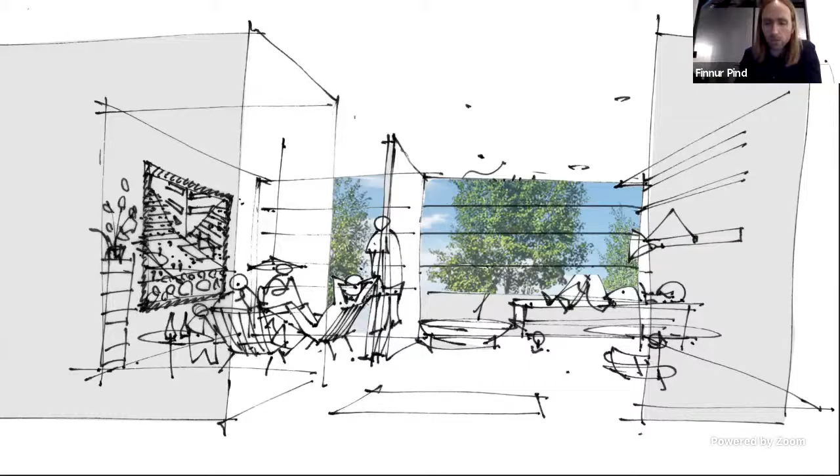And then when we go outside, that's a whole other domain, but again, serious negative impacts due to noise. For example, the World Health Organization says that noise is the second most harmful environmental factor affecting human health, just after bad air quality. And noise is generally on the rise across the globe. They say also that just in Europe alone, more than 1 million healthy life years are lost every year due to noise. So it is indeed a huge public health issue.

And then last but not least, of course, in concert halls and cultural spaces, auditoriums and so on, it's desirable to have the appropriate acoustics. This hall that we see here is actually just a few hundred meters from where I'm sitting right now. It's here in Reykjavik, Iceland.

Harpa is the name of the concert hall, or the building itself, and the hall itself is called Eldborg. This is designed by Henning Larsen Architects, and the acoustic consultant was Artec from the US. Very nice hall, if I may say so.

All right, but as I mentioned earlier, Treble's history goes back quite a few years before early 2020 when we actually started the company. When we started the research work, that was around 2016. We set out to address this question that I write up here. Can we develop some technology or some methods that can make sound be a more integral part of building design, such that we end up shaping spaces, doing space planning, selecting materials with sound in mind, or driven by sound, hopefully from the earliest sketches and throughout the whole design process.

And it's a kind of a tricky thing because sound is indeed an intangible phenomenon. It's invisible. It's hard for people to relate to and to design it and work with it, both from an optimization perspective and also from a creative perspective, if you want to create some interesting or even thought-provoking soundscapes. It's hard for people to do that. So we really wanted to develop some technology that helps with this.

My PhD project, which was the initiation of this work, was actually initiated by Henning Larsen Architects. They were quite often running into problems with sound. They would design something that looks great and works in various ways, but then sometime late in the process, some sound specialist would be brought on board and they would say, sorry, it's all backwards here. We have to go back to the drawing board because it's going to sound terrible. So they were repeatedly running into issues with sound and acoustics and wanted to try and develop something that could address this issue. And that's how my PhD project came about.

Just one second break here.

So if we take one step back and think a little bit about what's going on behind the scenes, this slide illustrates the process. Ultimately, we need to do some simulation of sound to be able to understand it, design it and optimize it. The process works in this way: first we start with some input data to the simulation. We need obviously a model of the geometry in question, whether that's an interior space or an outdoor domain. We need some information about the surfaces in the space or domain, the acoustic properties of how different surface types absorb sound when a sound wave hits them.

And we need some information about what sound sources we expect to be present. We then feed this to a simulation algorithm that computes how sound propagates in the space, essentially how sound is radiated from the sound source, bounces around the room or the outdoor domain, and then reaches some listener or receiver.

And then the output of the simulation can be in various forms. We can get out just kind of graphs and numbers. For example, this parameter reverberation time, that's quite commonly used as a sort of indicator of acoustic quality or acoustic comfort of the space. We can visualize sound. That can be helpful in certain cases.

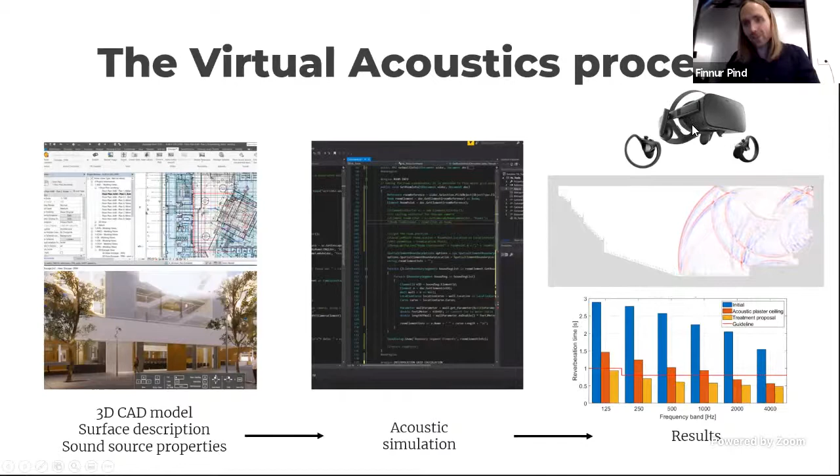For example, here, designing a concert hall and you want to design some sort of canopy up here, which reflects sound to all seats in the hall. Also, if you want to spot some undesirable echo patterns or things like that. But then maybe the most interesting part, arguably, is rendering of sound, so we can experience how the space actually sounds. And our take on it is kind of summarized here in this product that we're currently developing.

It's still in development, I should say. We're planning to release it late next year. But we're already doing various pilot projects with all kinds of interesting people from the industry, using it in practice. And I'll give a couple examples of that later. But what we very much want to do is we want to plug directly into the workflow of the industry and into the tools of the industry.

So we don't want to make a standalone tool, but instead we want to be a plugin into Rhino and Revit, perhaps other common 3D modeling platforms. At least to begin with, we're starting with these two. And this way we're hoping that the whole effort and manual labor that it takes to set up and perform an analysis of acoustics will be very, very fast and efficient. And hopefully that in turn leads to people doing it more, because it's not a whole thing to have to do it.

Nowadays, if an architect is designing something, let's say in the rather early stages where the design is maybe changing a lot and fast, then if you need some input on the sound or the acoustics, very often the architect calls up his acoustician and they get an answer two weeks later or something like that, because it's a very slow feedback loop. And that's not ideal, I would say, and often leads to the acoustics just being evaluated at the very end, when the design is more or less set, and that's obviously not good, because then we can't really work with the design from the sound perspective.

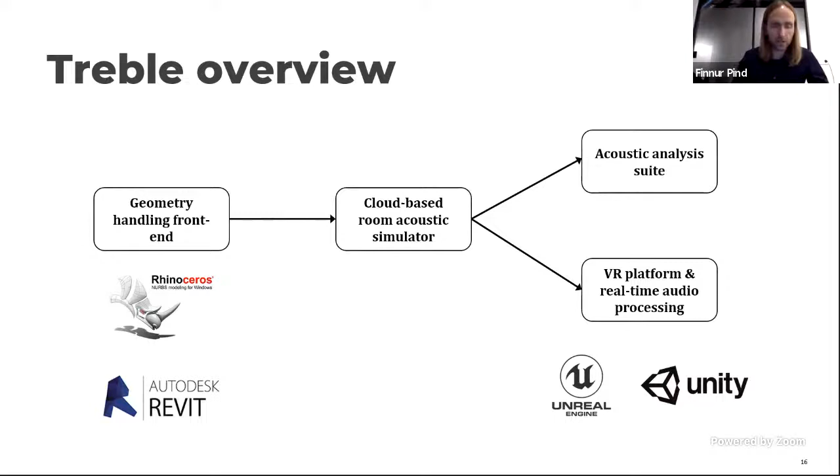And so I'm just trying to say here, we're very much working on this part of the whole chain. That's kind of where our main challenge is, I would say, at the moment, actually. So it's very interesting. Got it. Okay.

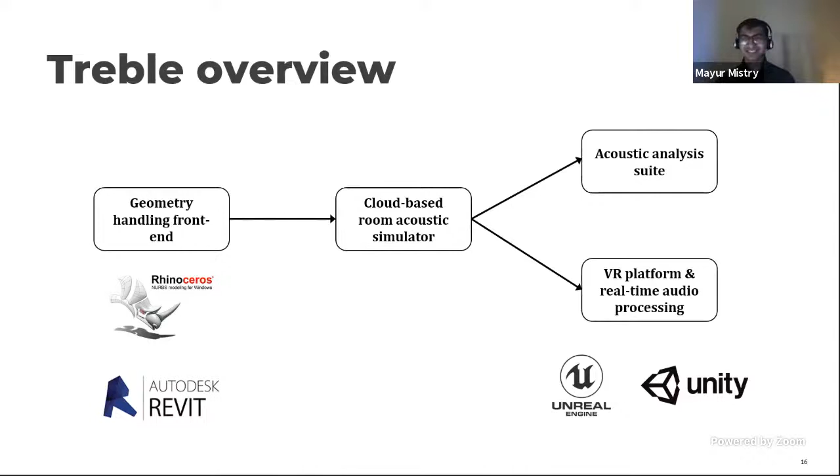Here is a quick view of the tool, the way it works now. It's still very bare bones, I would say, because as I mentioned, we've mostly been focusing on the back end, on the core engine, but now we're just starting to dip our toes into the front end and the link to the geometry and so on. But what we can see here is, let me just pause this a little bit here.

So here we have Rhino, which I'm sure you're familiar with. Have some simple model of a small open plan office here. This is an example. And then our tool is sort of a plugin into Rhino. And then you have the layer structure here from Rhino. And then we have our own separate Treble layer, which is where you put in the relevant geometry and some parameters for the simulation.

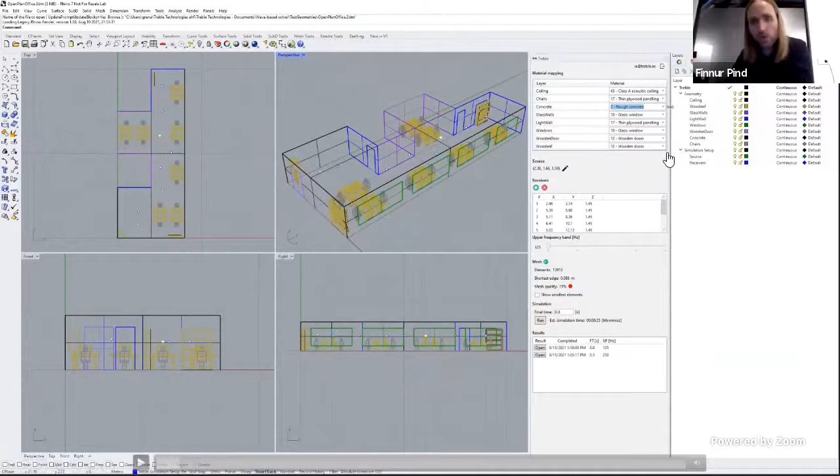And then here in the plugin, you adjust some configurations for the simulation. You need to assign the surface properties that I mentioned earlier to the different surfaces. Again, this is very bare bones at the moment, but still, we're able to run the whole process here. And then you put in a sound source somewhere in the space and a bunch of receivers. That's where the listener is positioned.

I don't know if I should go into details. There's some details that you need to set here for the simulation, some parameters, and then you essentially just hit run, and the simulation goes to the cloud, and then you get back some results. Let's just take a look here. So here's a material assignment, creating the mesh, as I mentioned earlier, done in the cloud, and then hits run.

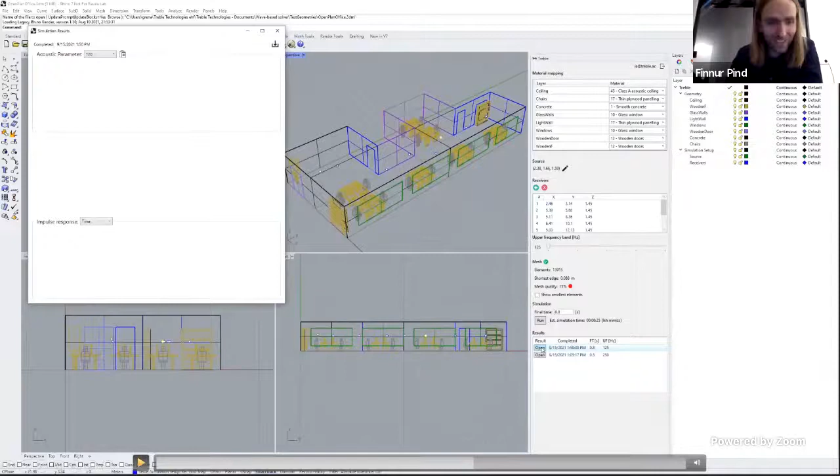And I will admit that we cheated a little bit there. It takes a little more time than just the 2 seconds there, but not so long, but still we cut the video there. But then here you get out some graphs and numbers, as I mentioned earlier, that can describe the acoustics. What we're seeing here is more of an engineering tool, so more detailed, rather than a tool that's maybe more aimed at designers.

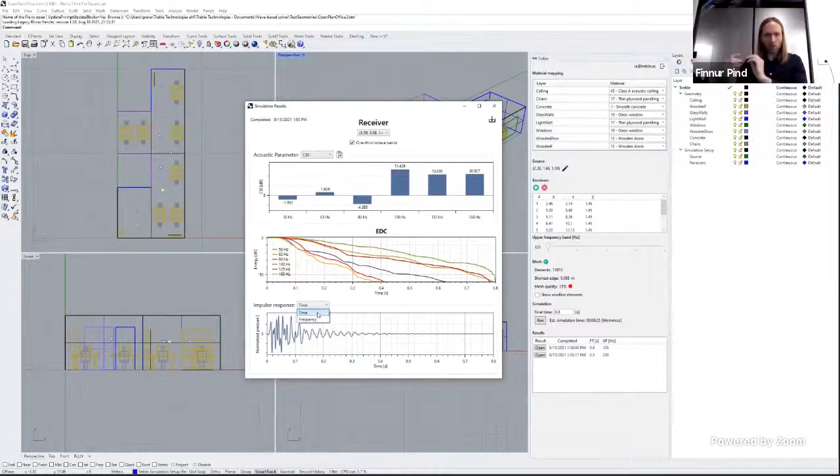So our plan is to develop 2 versions of the tool. One which is super detailed and super engineering-y, where you have all the little nuances and details that you can analyze and so on, which is aimed for the acoustic specialist. And this is heading in that direction. This is our alpha version of that tool.

But then we want to do another one, which is equally powerful on the simulation engine, but with a much simpler interface and simpler usability and workflow, aimed more for people who are not specialists in sound, like interior designers and architects and so on, but to enable them to do some sort of evaluation of the acoustics and at least push the design in the right direction.

And then you probably won't see details like these technical things here that you need to adjust in the simulation, and the results will be more simple and so on. But I thought I would still show you where we're at the moment.

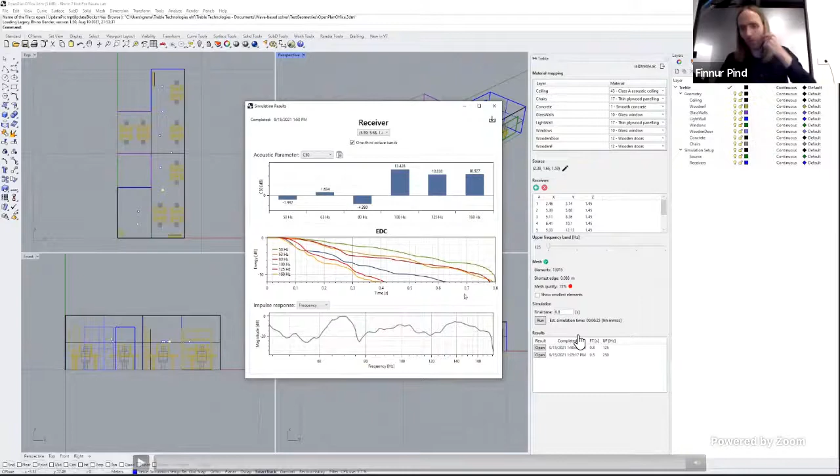Yeah, I was thinking it might be interesting, like sometimes we compare different materials during a simulation. So if in a drop down I can select a couple of materials, and on the cloud I can do parallel computation and do a comparative analysis report. Absolutely.

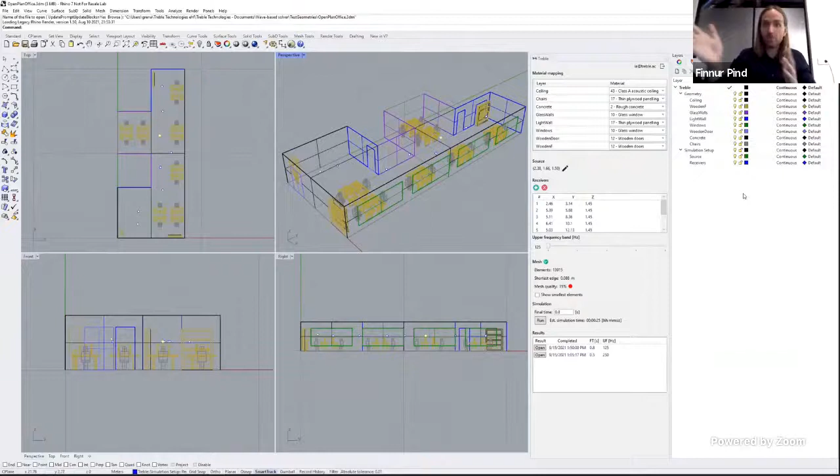Exactly, exactly. That's one of the big things that we would probably design and optimize: the geometry, the space planning, and then the materials, and being able to ship to the cloud various versions of this and then get back results and compare them in some simple way. That's the ideal, I would say.

Hi, Finnur. Richa this side. So my question here is, when we talk about insulation and material, are we talking about the walls and stuff? Also, are we talking about lights, which have some acoustic conditions, or some paneling? Do we talk in that detail?

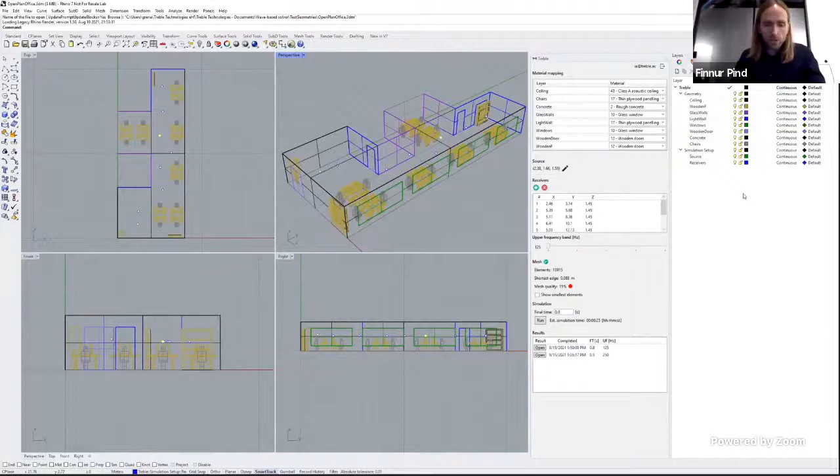We try and take into account all the surface properties, you can say, in the space. Lighting per se, we don't evaluate, but if you have some absorbing free hanging fixture, whether that's a lamp or some free hanging baffle or something like that, we can certainly take that into account. Does that answer the question?

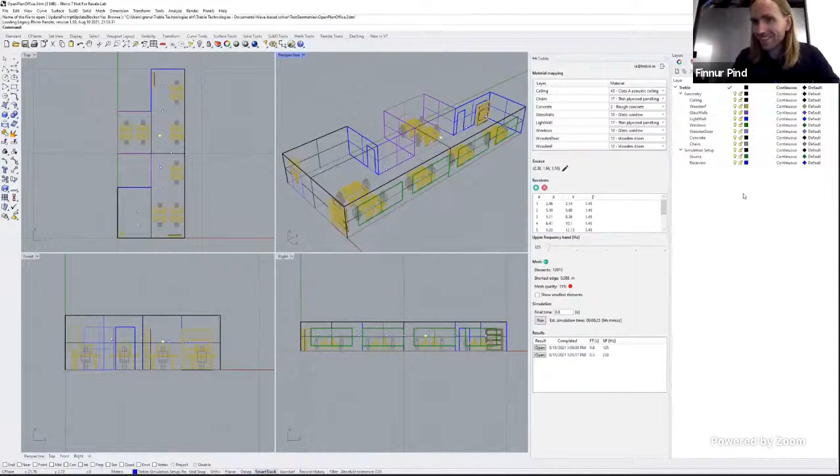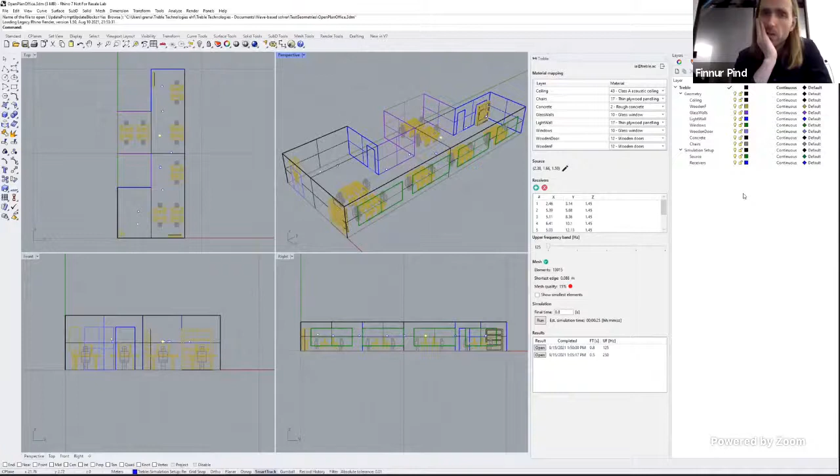Yeah, in this process right now, how do we give that input that we're using that certain light? Will this automatically adjust and understand that that light has a particular material, so it has some absorption capacity? Yes, absolutely. So you can put that in; at least the way it is now, you would have to draw in the fixture or the lamp and assign some material properties to that. Then it would take that into account. Very good. Okay.

Here's a quick overview of the different key tech features that we've developed. First of all, the simulation engine. We've done a lot of research into developing a totally new way of simulating sound and how sound propagates in a space, which is much more accurate than what's been previously possible. And that is enabling us to create these authentic listening experiences. It's been kind of difficult to do that up until now.

You can certainly do sound in a 3D model. For example, video games have had that for many, many years. But if you want it to be physically close to reality, because ultimately we're designing reality when we're designing buildings, that has been very difficult because the fidelity of the simulations just hasn't been there. We teamed up with leading scientists in the field of computational mathematics and wave simulations and ended up developing this very new approach to simulate sound, which enables this.

Then we have a whole system which enables us to take those accurate simulations and experience them in the audiovisual virtual experience, in real time, where you can walk around, interact with the design and so on. A whole other world, which I won't go into the details of, but I spent a lot of time during my PhD researching, was how different materials absorb sound. For example, the lamps we just discussed: it can be quite complicated how a material or buildup absorbs sound, and to incorporate that accurately in the simulation.

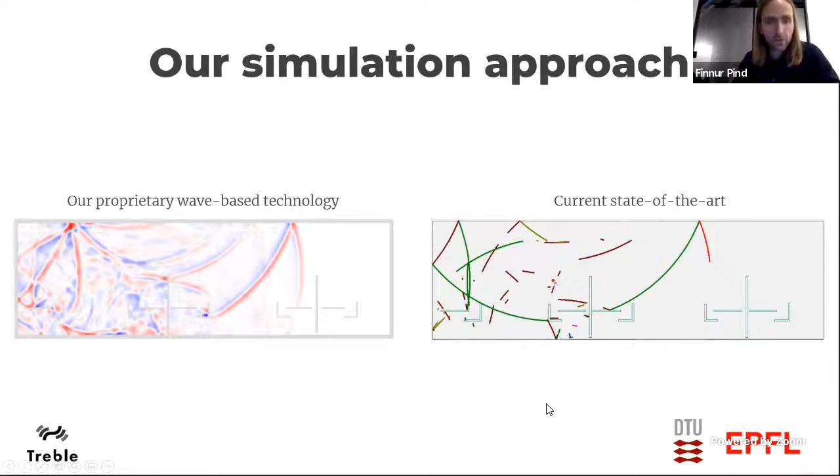Here's one illustration which compares the way we simulate sound to what's typically done today, for example in video games and the few tools available for sound design in buildings right now. Our approach is what is called a wave-based approach, where we actually solve the physics equations involved and capture the wave nature of sound.

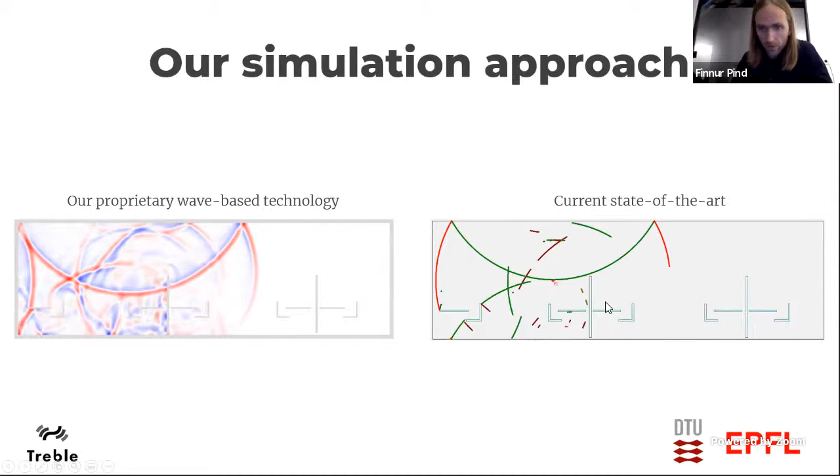Whereas the current approach is what's called ray tracing or geometrical acoustics, where we essentially neglect the wave nature of sound. This is meant to be an open plan office here. You can, for example, see how sound bends around this partition wall, whereas in the ray tracing approach it doesn't do that. So that's maybe a bit technical discussion, but very interesting still.

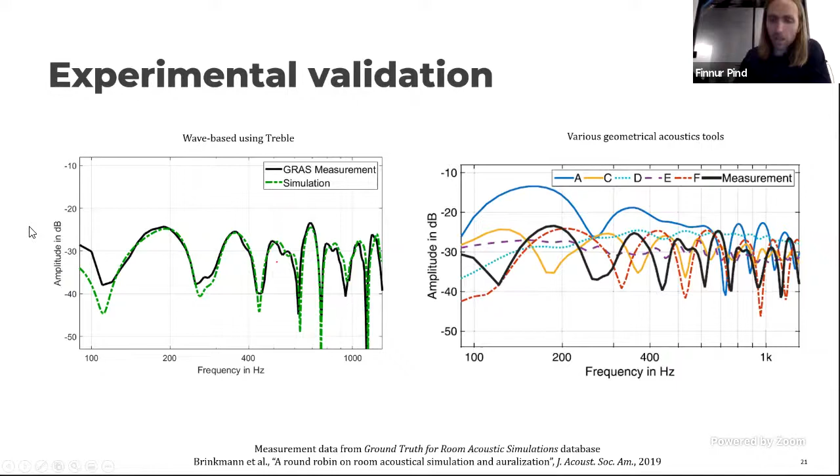And as you can see, actually none of them are able to model this kind of complex geometry. But when we use our wave-based approach, we are able to capture this with pretty good detail. So that's an indicator of the fidelity of using this wave-based approach. Okay, that was for a static case, but it gets even more important when we start listening to the space and walking around the model and experiencing it, because these wave effects have a pretty big impact on the way we perceive sound.

So these are two well-known problems that illustrate the issue here. One is called the lamp post problem. So imagine you have someone making a sound over here, and you're standing here, and there's something very small that directly blocks the line of sight between you and the source, like a lamp post. Then in reality, if you have a lamp post between you and someone talking to you on the other side, it has no impact on the sound whatsoever. Sound just kind of goes around it.

But if you don't capture this wave nature of sound, then you would get a very unnatural blocking of the sound when the line of sight is blocked. When you move your head just a little bit to the left, you would get this jump in volume because now the sound is there. But in reality and with the wave-based approach, we capture this bending around obstacles phenomenon, what's called diffraction. And then the whole listening experience is more natural.

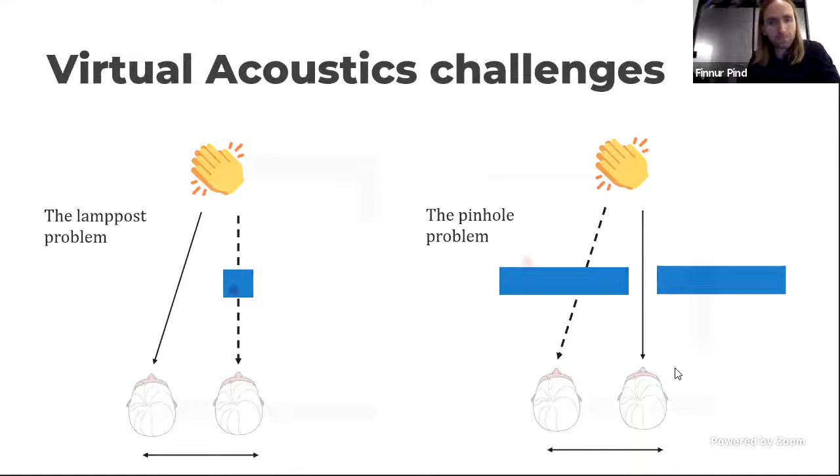And then an analogous problem is when we have a big surface with a small slit in it, then again, you would get this unnatural jump in volume if you don't capture the wave nature of sound. And this is, as I mentioned, due to diffraction, which is this phenomenon of sound waves bending around obstacles and around corners, the reason we can hear someone that we cannot see.

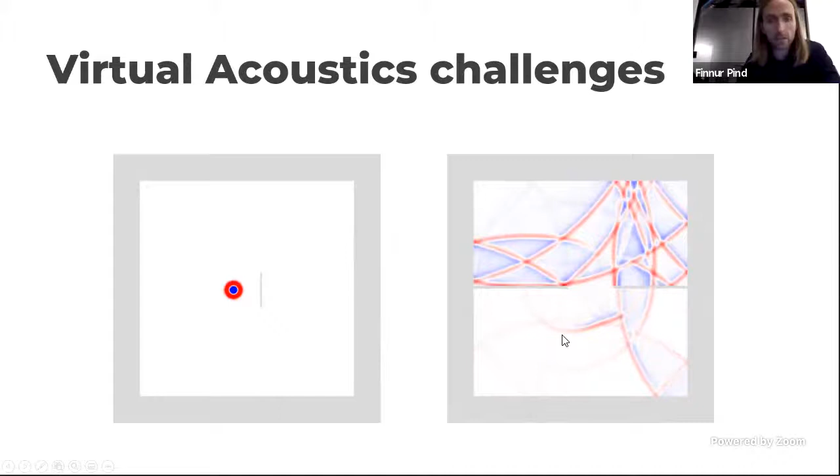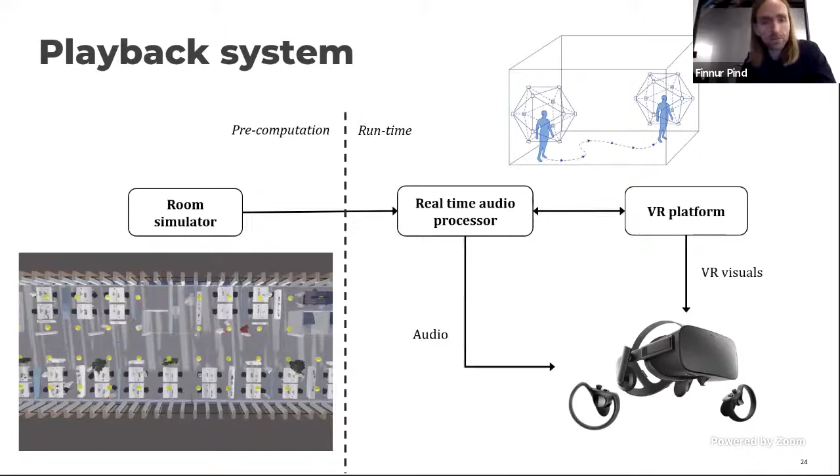Okay, now we're done with the nerdy part, the technical parts. We can hopefully come down to earth again and take a look at a couple of examples of case studies. The first one I want to tell you about is something we did together with Henning Larsen Architects. We, of course, have a very close connection to them. I did my PhD with them and so on.

And this was a city hall in Uppsala in Sweden. It's a part renovation and a part new build. So they expanded the size of the building fourfold or something, I think. So it was a very small building beforehand, then they greatly expanded the size of the space.

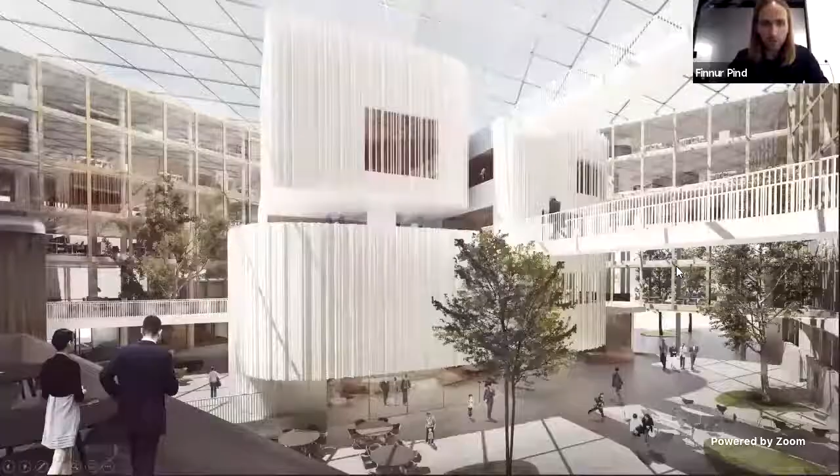And it's mostly office spaces, but also you have, for example, this very large, nice atrium space there in the middle. There's also a nice big auditorium here. It's kind of an interesting building. I think it's kind of a building within a building. So you have the outer building, which is kind of surrounding this big atrium space, and then you have an inner building or interior building here in the middle, which has the main city hall and so on. So it's a pretty cool design.

This atrium space is actually open to the public, so people can walk through here. So we can expect at times that there will be a lot of people present in the space. There's a cafe in here. At times politicians will be coming out of the main city hall. So it's kind of tricky from a sound perspective. And then on top of that, on the material front, we have just glass everywhere, glass ceiling, hard floor. So again, tricky space.

So what we decided to do was to do a virtual mock-up of this space during the design process, where the architect and the client and all kinds of stakeholders could experience different design options. They could play around and test out different things and see what worked and what didn't, what impact it had on both the aesthetics and the sound, and help them make an informed decision. And it proved to be very valuable in the process, and helped everyone understand the importance of taking sound into consideration here, and understanding how far we had to go in order to make the space comfortable. So I will show you a video from the virtual mock-up.

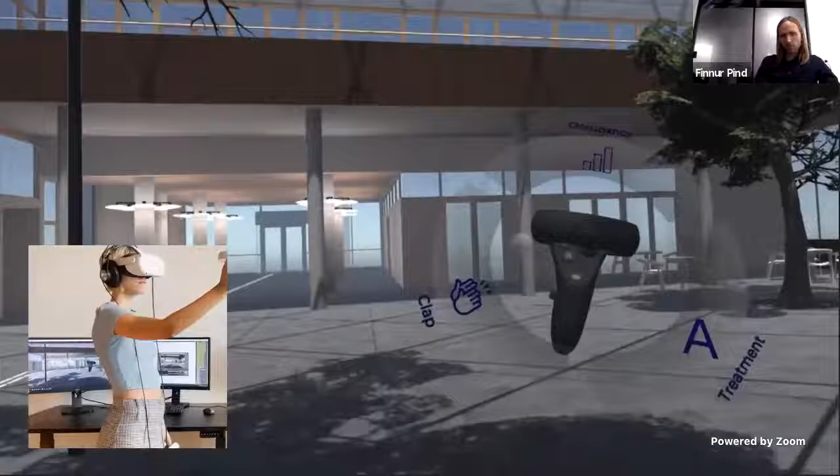Now she'll go into the auditorium.

Made up of words that come to me spontaneously, words that speak the honest truth. Expect from me nothing else, because I do not believe, fellow Athenians, that I should be appearing before you at my age, behaving like a child, trying to construct over-adorned speeches. This is the only thing.

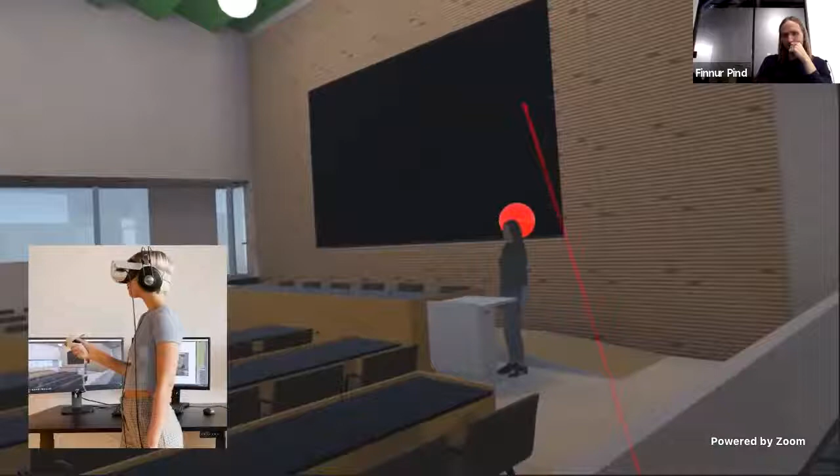She's turning off the sound source so she can hear the sound from outside. Then she switches and you can hear the level go down. And come back. So this is one of the early pilot projects that we did. Still things are in development, and all kinds of aspects that we would like to improve, but I think it shows the idea of this virtual rendering part of our offering quite okay.

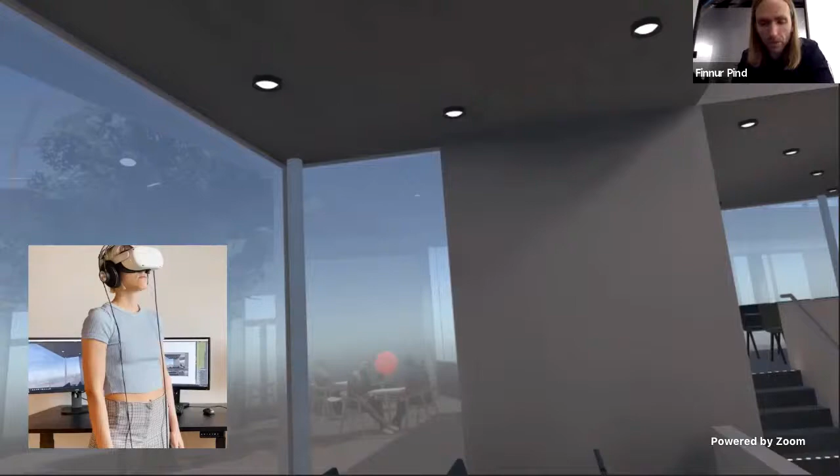One nice example of an outcome of this work was that we ended up designing these wooden frames which were incorporated into every element of the glass facade that surrounds the space. And these frames have the dual function of both just looking very good, I think, and of absorbing sound. So we have some sound absorbing material here behind. This was a big part of what we ended up doing to help ensure a good environment in here, along with some other things too.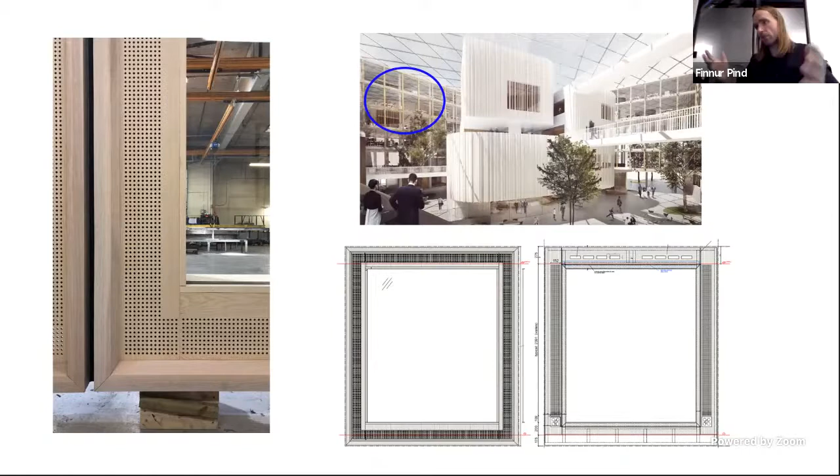But I just think this is a nice example of what can happen when we think about sound in the early design stages. Then we can actually incorporate the sound design into the architecture, as opposed to it just being something that we kind of plaster on afterwards.

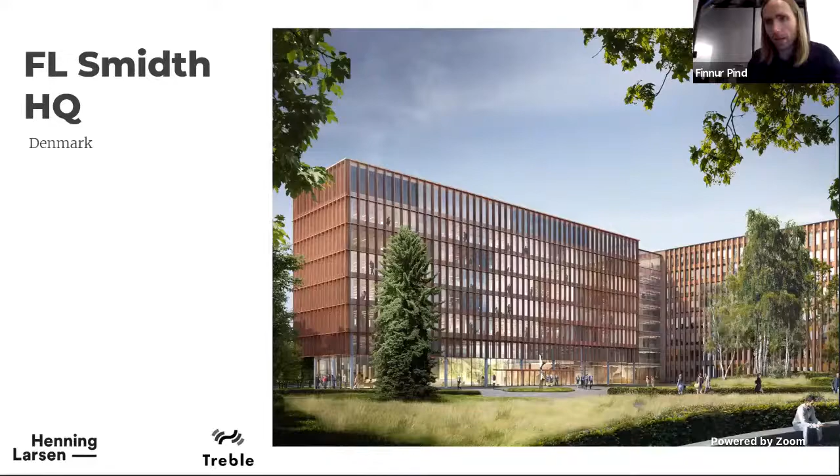Okay, this is another example, also with Henning Larsen. This is an old office building in Copenhagen that was being renovated, going from traditional old-style closed offices to more modern open plan offices. And the client here was very concerned about sound, people's ability to concentrate and focus and have privacy and so on in these open plan offices.

So we did a virtual mock-up actually during the competition phase to illustrate to the client that we were taking sound very seriously and thinking about these aspects. And so again, I'll show you a video from a virtual mock-up where we show all the different things that we had incorporated into the design to think about sound and make the sound environment better.

For example, we put absorbing material in the ceiling. We put absorbing material here into the walls. We put dividers. We put glass partitions to break up the space into smaller segments while still keeping a nice visual openness, you can say. And in the video, you'll see the user being able to switch on and off these various aspects that we incorporated into the design and experience the difference. So let's take a look.

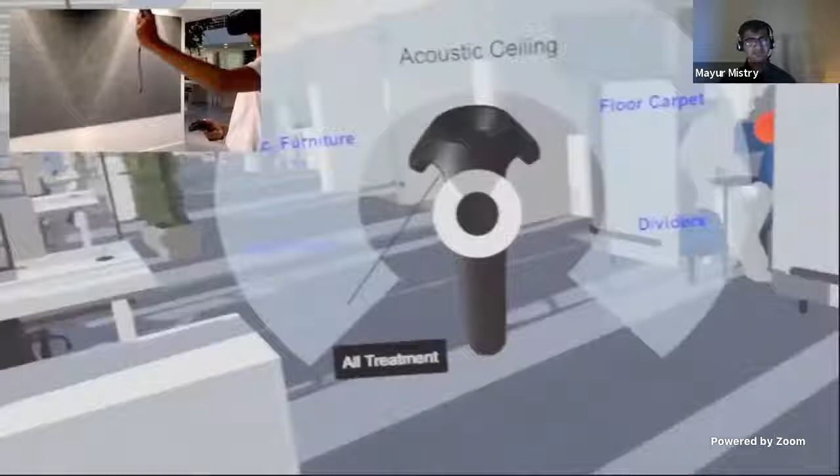Here's another project we did together with Kirkegaard. Kirkegaard is an acoustics consultancy in the US, specialized in doing performance halls and concert halls and so on. So what they are interested in is very high fidelity, detailed simulations of the acoustics, more like an engineering optimization task, designing these high-level concert halls where they need to be sure, going very much into the details.

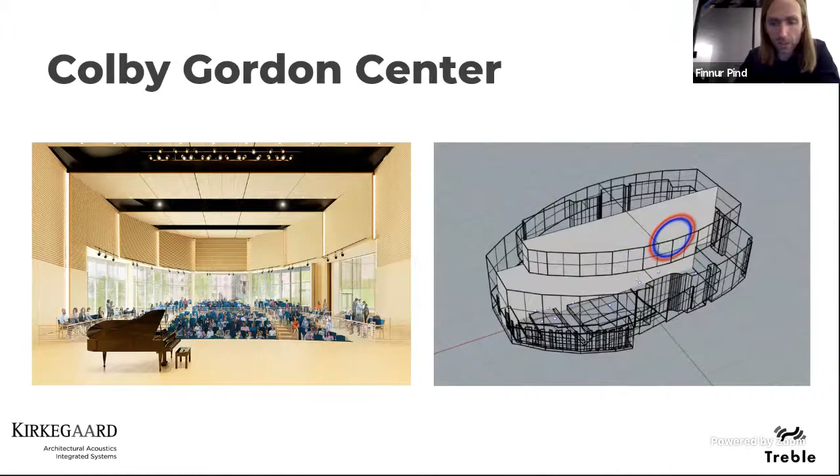Yeah, and I think this is my last slide. I sometimes like to mention this, that we have developed in Treble this technology of simulating and rendering sound in a very accurate way and producing very authentic listening experiences. And we're very much focused on the building industry at the moment, developing tools to enable architects and engineers to better work with sound.

But we do also see that this technology could be useful in other industries too, where it's desirable to have authentic or realistic sound, whether that's video games, all kinds of VR applications, or when you're designing the acoustics of a car cabin, or some audio products. So just to mention, just between us, that we see some applications beyond just the building industry. All right, that was it.

Thanks a lot, Finnur. It was an incredible presentation. I'm doing a virtual round of applause for you. It's amazing work, and it inspired me a lot. Based on the technology you have developed and the case studies you have, I could foresee the impact one could make using this technology. That's good to hear. Incredible work. Thank you very much. Thank you for your kind words.